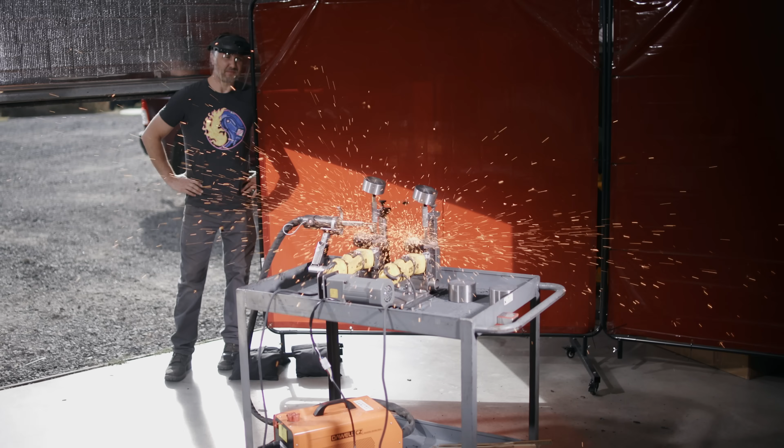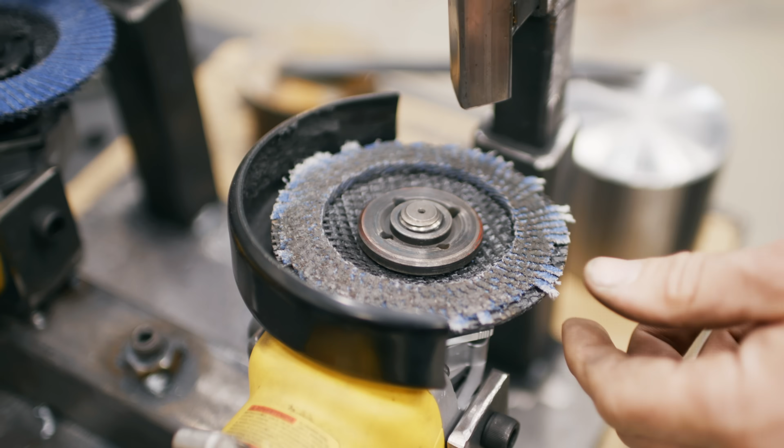This is my Disc Destroyer. It's a mean little machine with one job: testing grinding discs. With so many grinding discs and countless reviews, it's hard to separate fact from fiction. This is where the Disc Destroyer comes in. It cuts through the noise, delivering real results. No bias, no sponsorships, just cold hard tests.

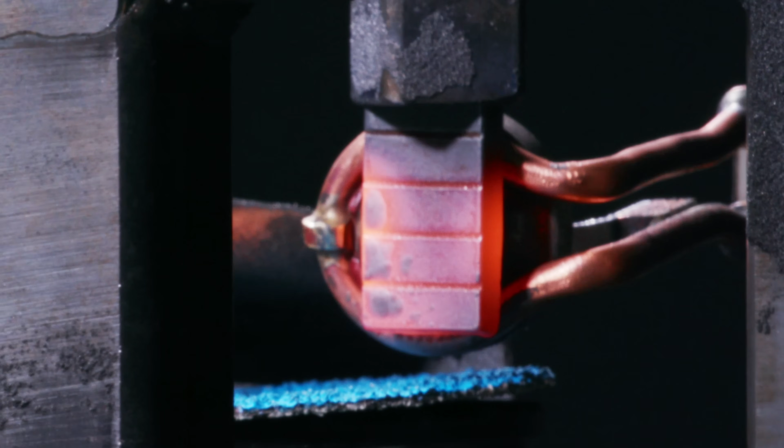Grinding discs can face a lot of real-world challenges, like high and low pressures, hot and cold materials, and of course, fast and slow speeds. This machine tests it all, so that we can finally find the truth in the reviews.

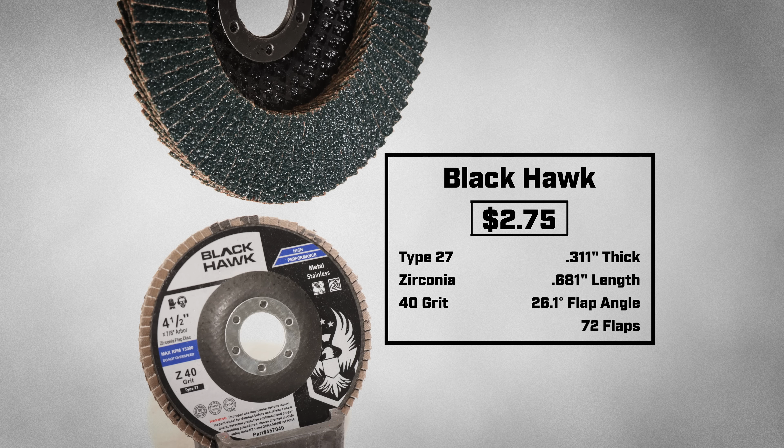Today I am testing the Black Hawk Type 27 flap disc, coming in at $2.75. There are a lot of positive reviews for this disc. Many praise its durability and its effectiveness compared to other discs at higher price points. However, there are also plenty of negative reviews that claim the opposite, saying the disc's durability is its weakest aspect.

This dissatisfied reviewer says the disc deformed very quickly and did not hold up to his standards for finishing. Even this middle-of-the-road review mentions how quickly the disc wears out. So which of these reviews are spot on, and which reviews are way off? Let me break this down for you.

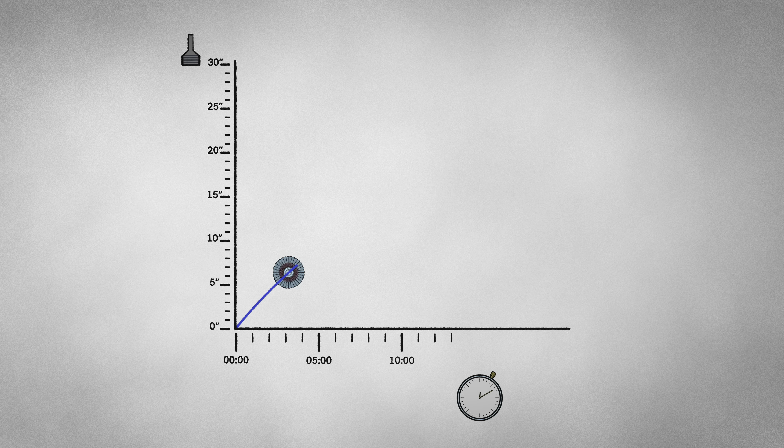Each disc will be grinding this test bar to see how much it can remove within 10 minutes time. This will chart out its story and tell us exactly how this disc behaves based on how much material it removes at any given point. But if the disc stops effectively grinding the bar or just straight up disintegrates, the test is over.

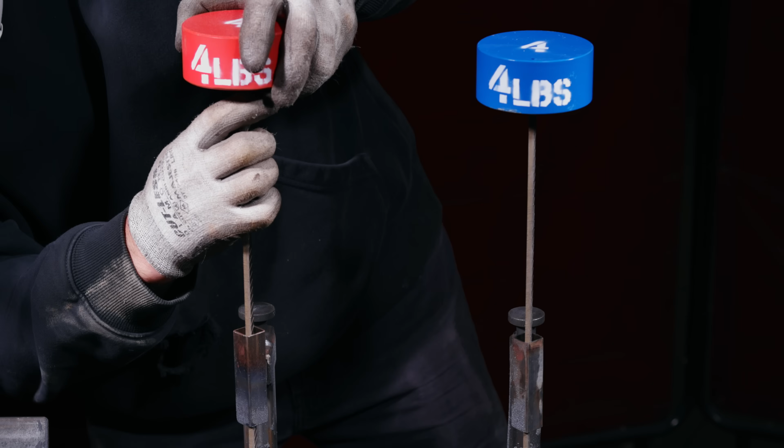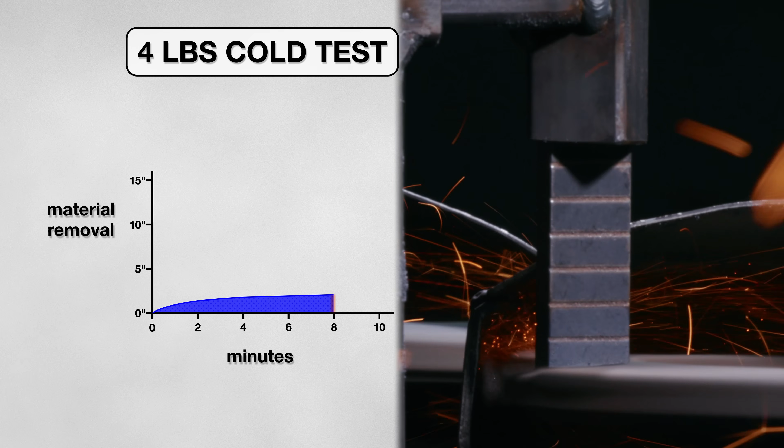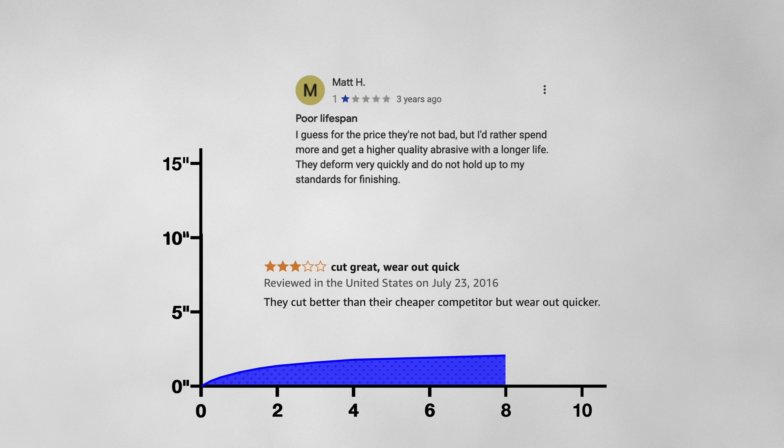Let's begin. I started by replicating light pressure grinding with a 4-pound weight, about the same weight as a grinder. This disc was quick to start, quickly losing efficiency. After the first 4 minutes, the disc was already showing signs of glazing, and by 8 minutes the test was stopped, because the disc was no longer taking material off from the coupon. When I took a closer look, I saw a little over 2 inches of material had been removed. So far these results were lining up with the more critical reviews, especially in its short durability.

Now I want to see if we can make the disc last longer with a heat variable. So I heated up the first few inches of the coupon to simulate grinding a hot weld. Unfortunately, the disc performance was nearly identical to the cold test, only getting another half an inch in the same amount of time. But I am determined to get the best out of this disc, so I changed up one more thing.

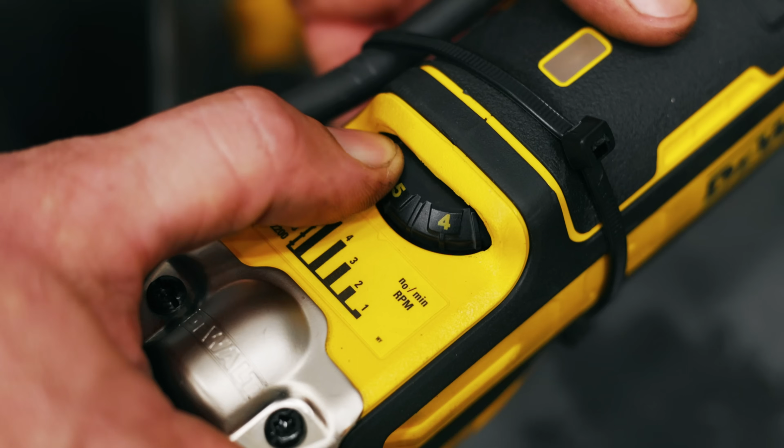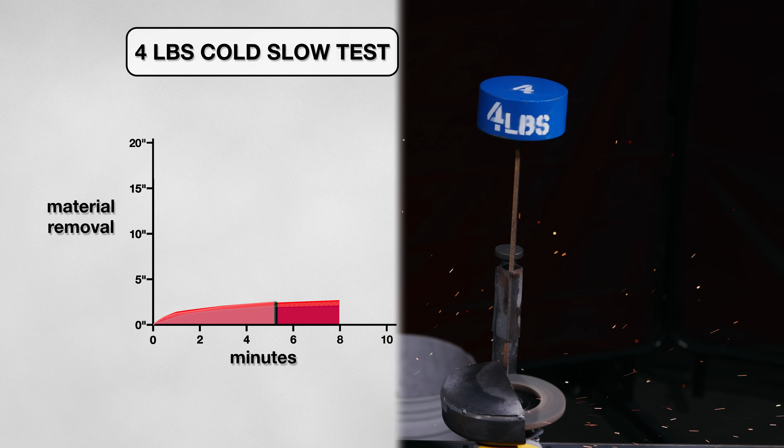The grind speed. I kept the 4 pounds of pressure, but decreased the grinder RPM from 11,000 to 6,000, just to see if that will help it take off more material. At the slower speed, the disc performed about the same. In both hot and cold tests, the effectiveness trailed off at just under 5.5 minutes. So what's happening here? It seems that our discs are glazing or losing the abrasive quality early in the test. These results are definitely closer to the more negative reviews.

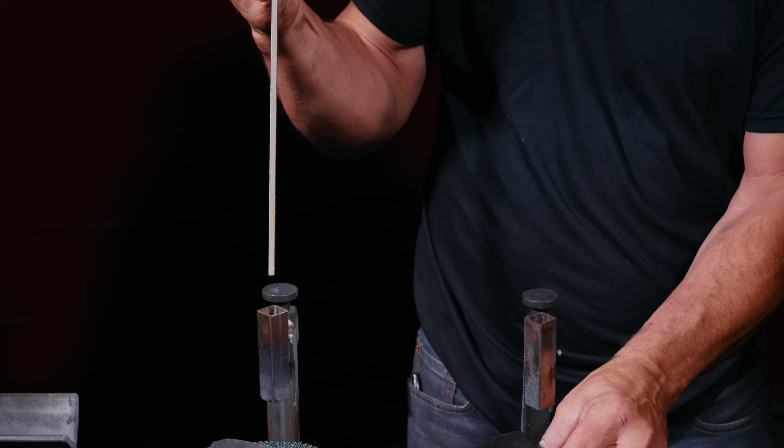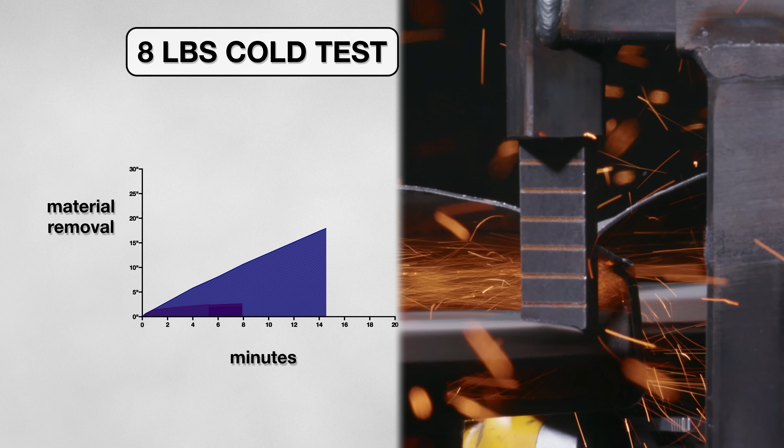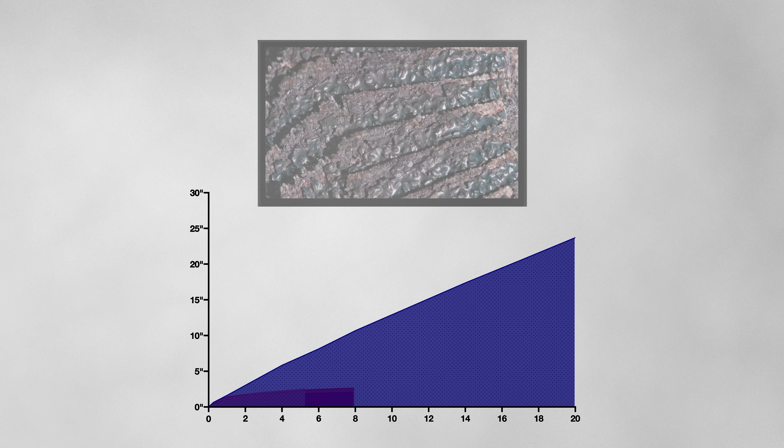Looking at the graph in this photo of the disc after 20 minutes, it certainly seems like it could grind on and on. Let's see how it handles grinding a hot weld under this pressure. With that added heat on the coupon, the disc once again lasted all 20 minutes of the test. This time it performed slightly better, taking off just under 24 inches of material. The hot metal didn't wear down the disc and actually gave it a small edge over cold.

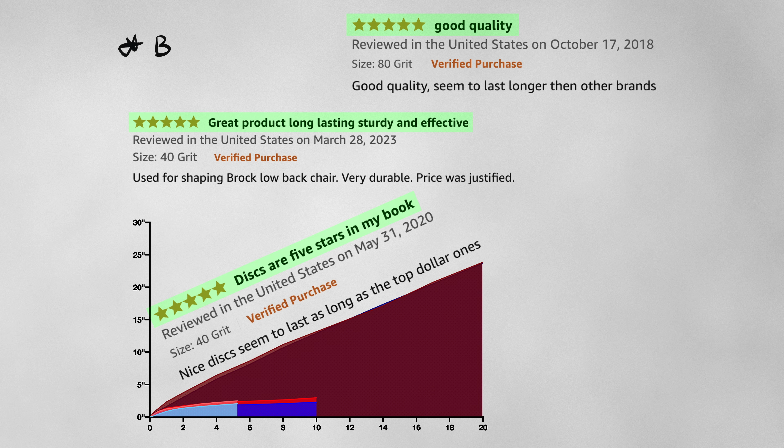So how accurate are these reviews? Well, according to these tests, I believe that these positive reviews were achieved with heavy pressure on the grinder. And as a bonus, if you grind on hot material with heavy pressure, the disc's performance will be slightly better. As for the negative reviews, they likely used the disc with light pressure, making it glaze quickly. I did not, however, see any deformation of the actual disc.